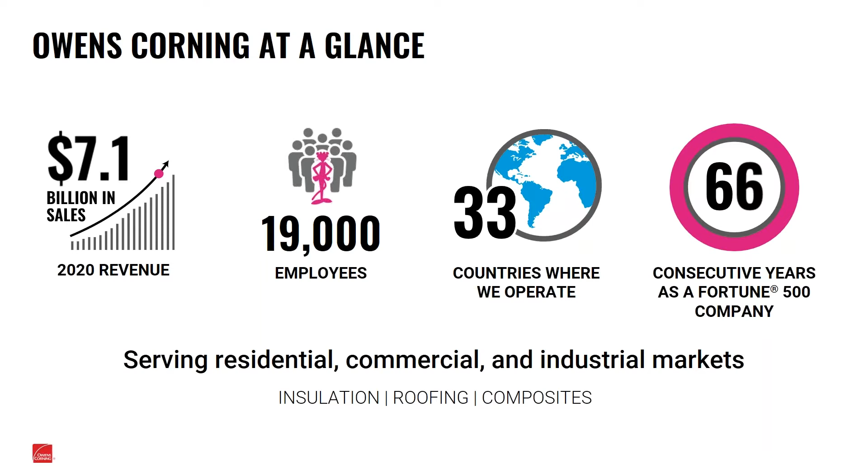Now, to start off with, we're going to do a quick introduction. The first question is, why do we insulate? We're going to look at the impact of water intrusion from both a thermal and corrosion under insulation, or CUI, perspective. And we're going to talk about moisture intrusion and how it happens. Next, we're going to talk about insulation systems design and material testing for moisture, which is something we don't always cover when we talk about CUI or system design. And then finally, we're going to end up with proper installation and also talk about the water-resistant mineral wool solution.

So going forward, the basic question is, why do we even care about moisture and insulation? Now, best case, and this is a very short-term problem, but let's just suppose we get moisture in our insulation. The first thing that it does is degrade the thermal performance. I always think of the analogy of if you're swimming in the summertime and you're hot, and you jump in the pool with your shirt on and you come out and your shirt's wet, you tend to feel much cooler until that water evaporates off your body, and then you start to warm up again. And that's because as that moisture is evaporating off your clothing, it's also removing heat as well, and it's also increasing heat transfer, which kind of helps keep you cool. But it's much worse if you have moisture in your insulation for an extended period of time.

You not only have the effects of degraded thermal performance, but you also potentially create corrosion under insulation issues. So now you have that water under there for a long period of time, and corrosion is a chemical process, and the longer that process continues, particularly at elevated temperatures, the more transfer of electrons, or more corrosion, that you're going to have. So one of the proposed solutions is Owens Corning's Thermafiber Pro Section WR pipe sections, which are a water repellent insulation. Now, water repellency by itself isn't necessarily the cure for these things. It goes along with a system which we'll talk about in a little bit. But ideally, the best way to get the thermal performance that you designed into the system, and to avoid corrosion under insulation, is to keep the water out to begin with.

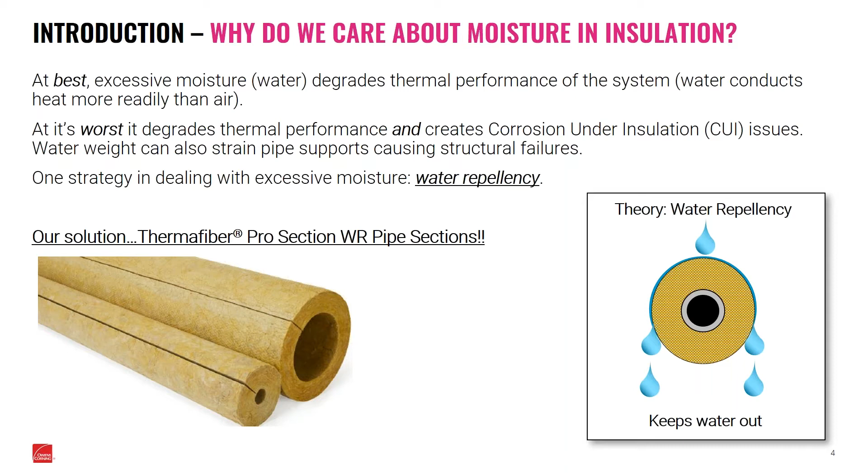Why do we insulate? People often ask, if there's corrosion under insulation, why don't we just remove the insulation? You could do that, but the problem is there's so much heat loss if you don't insulate something. It's a good idea in terms of efficiency, cost, and reducing greenhouse emissions coming off whatever power source you're using, whether natural gas or electricity from a coal-fired plant.

Also, because that's a cold pipe, moisture wants to condense on it. So the only barrier between that cold pipe and the moisture in the ambient air is either the insulation itself, like foam glass which is pretty impermeable, or a fibrous insulation like fiberglass with jacketing over the top to help prevent moisture from condensing on that cold pipe.

So if we're transporting this cold liquid, say from a chiller to the thing we're chilling, we can help maintain that temperature, or at least reduce the rate that heat enters the system as it goes from point A to point B.

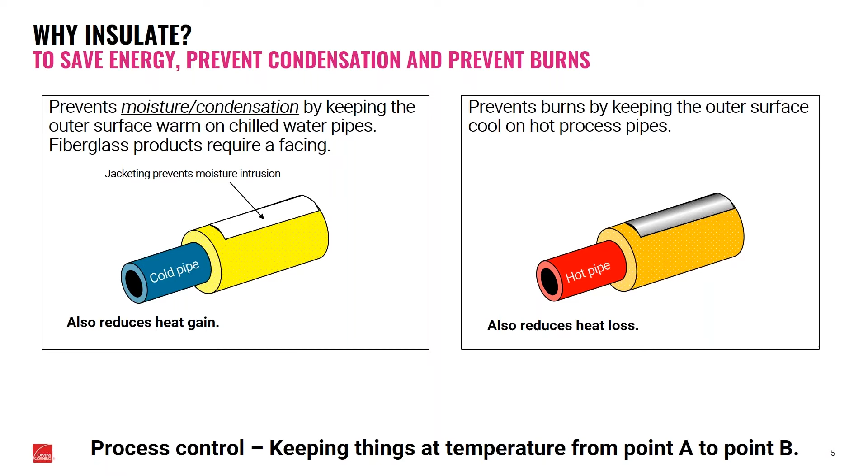Now, before we talk about moisture and insulation, let's talk about the insulation system. As an insulation manufacturer, we tend to have tunnel vision and only look at insulation, but really it's part of a much larger system, and this system has to work together.

If we go from the outside in, we start with the metal jacketing, which we have to help protect the insulation from the environment - could be weather, forklifts, people, just anything in that environment that could potentially damage the insulation. We want to put jacketing there to help protect it.

For an acoustical system, going clockwise, we'd have acoustic lagging, where we're adding weight to that insulation system to help dampen sound as it travels from the inside of the pipe to the ambient space.

And of course, we have insulation. Here we're saying it's there primarily for thermal reasons, although there are other reasons such as acoustical performance. In some cases you might use it for fire, but fundamentally you're using it for thermal reasons, to help keep the contents of that pipe at temperature.

Working our way in, we might have an exterior pipe coating, and again this is an optional component - probably a really good idea if you're in an operating range that's in that corrosion range, or where you might see a lot of moisture that could potentially get into that system.

Finally, you have the piping itself, and this is going to typically be one of two things: either plain carbon, which is fairly common, or possibly stainless steel in some applications that require more durability or more resistance to corrosion.

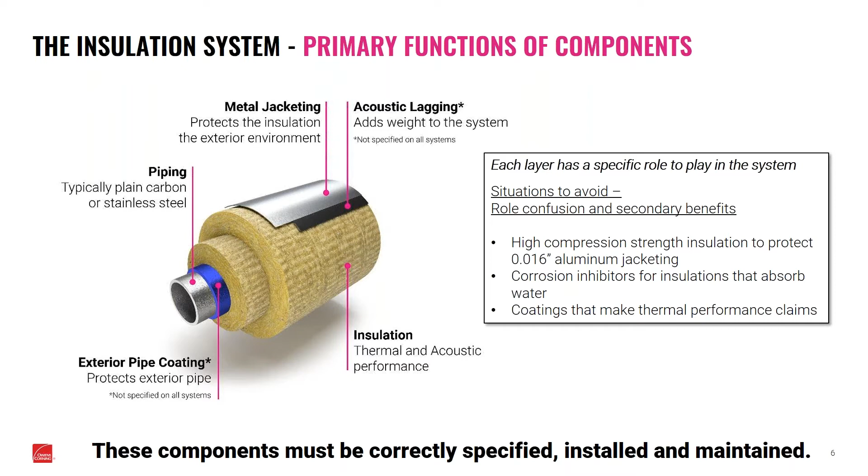So again, as you're looking at a system, you want all the components of the system to be correctly specified, installed, and maintained. We'll talk a little bit about maintenance later on, but it's something that we seem to forget about. Insulation is kind of out of sight, out of mind, so we don't think about it. But it is something we need to keep our eye on to make sure that we get the performance that we designed into that system.

Now, looking at the impact of thermal performance, I think anecdotally everybody knows that this is what happens. That water is going to conduct more heat, like the example that we had earlier. But if you look at water's thermal conductivity, it has 4 BTUs per inch per hour, square foot, Fahrenheit degree, which is about 15 to 20 times higher than what you would typically find with most common insulations, whether it's a foam plastic, fibrous, or cellular glass.

We have a system where, let's say we do add 1% moisture content, and it does impact our thermal conductivity. Even just adding 1%, we have a 23% increase in heat loss in terms of BTUs from that system, and we've increased our surface temperature 11 degrees.

Now, as we go each subsequent step, as we go from 1 to 2 to 3 to 4%, we can see that surface temperature actually increases. And we're looking at a 23-degree increase in temperature just from having insulation that has 4% moisture content. And we have a heat loss that's 51% higher than what we originally started with. So this is a real deal.

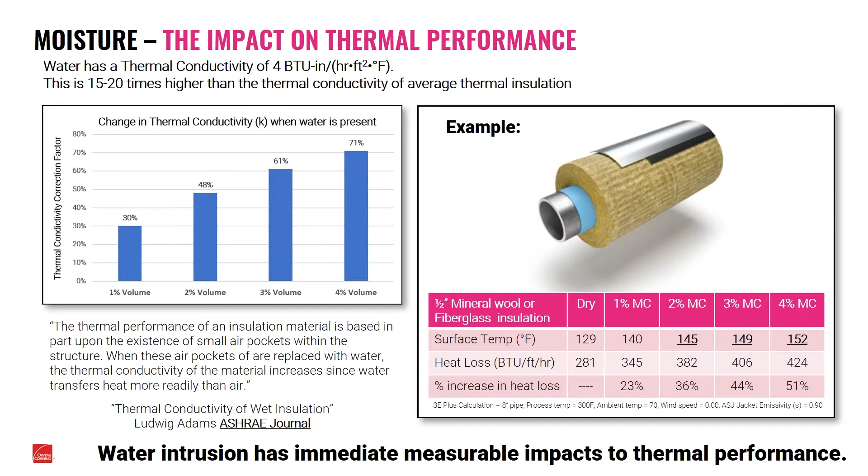Again, if we had to tolerate that short term, maybe, but not something we want to live with for very long, because all that equipment that we've sized anticipating a heat loss of about 300 BTUs per hour per foot, and all of a sudden we're dealing with 50% more than that, we're going to have a hard time with that equipment keeping up. So then that's going to create other problems.

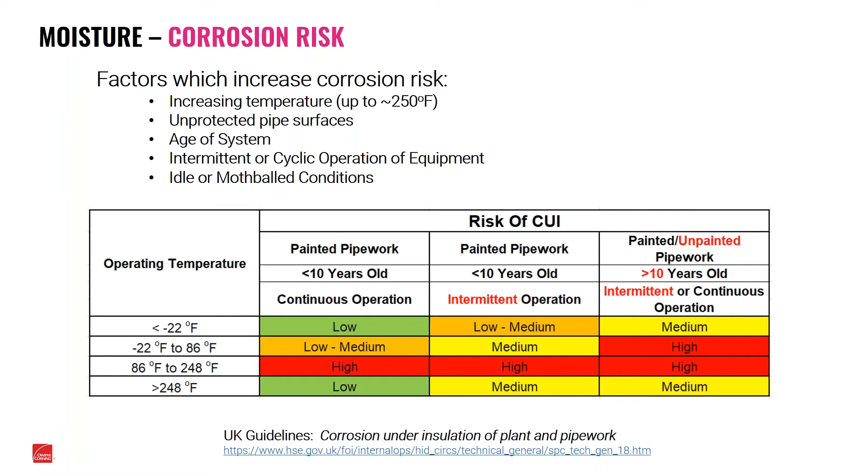So again, the impact of corrosion, and this is only one slide for those of you that have seen too many CUI slides. Corrosion's expensive. What happens is we have moisture that gets into our system because of any of these items: rainwater, flooding, pressurized cleaning, wind-driven rain, and a lot of times vapor penetration into the system. So there's a lot of ways that moisture can get in.

You can never make it completely vapor tight, at least on a high temperature application. If you're doing low temperature, you have to pay particular attention to detailing there. Hotter systems are a little more forgiving that way. We also have some other things to consider too, things like chemical exposures for both acids and bases, and salts.

I think a lot of times we tend to think of rainwater as being distilled water, not containing any chlorides. However, depending on where you're located, and depending on what kind of water you have available, you might have water intrusion from a freshwater source that actually contains chlorides. So any chlorides in the ambient air are going to get into your system.

Even though we have corrosion tests that look at taking distilled water through that insulation down to the pipe surface, they're using distilled water in that test. So if you're taking rainwater or water that has chlorides in it, and adding that onto there, your corrosion rate is going to be much higher. So again, another good reason you want to keep moisture out of your system.

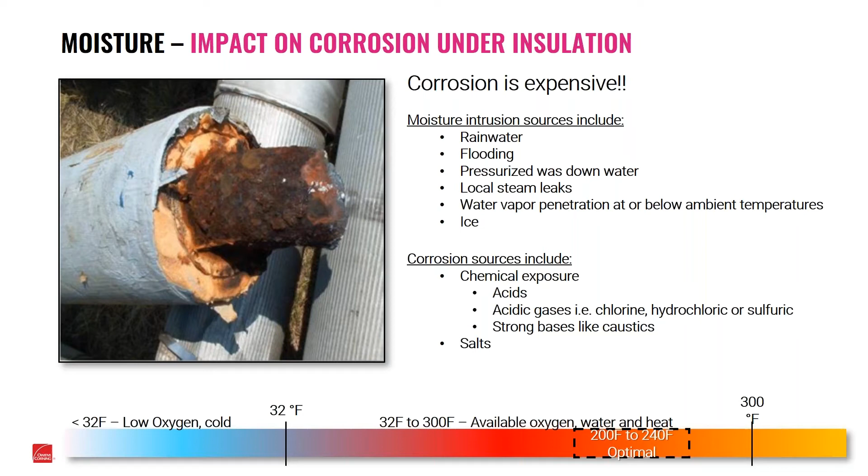Now, how does it get in? We talked about some of the sources, but here are some of the things we see in real life. If you look at the image on the left, you can see we either have damaged or missing jacketing. I think a lot of times somebody looking at that at a glance might think, oh, it's on a hot system, so the water will just boil off, so we don't really need to put jacketing on there. But once that gets saturated, you start having those problems we just talked about.

Maybe you have poor detailing, like you see in the center picture here, where they've actually just cut a gap in there. So unless that is protected from the elements or from any water sources, that's a prime entry port for moisture to get into that system.

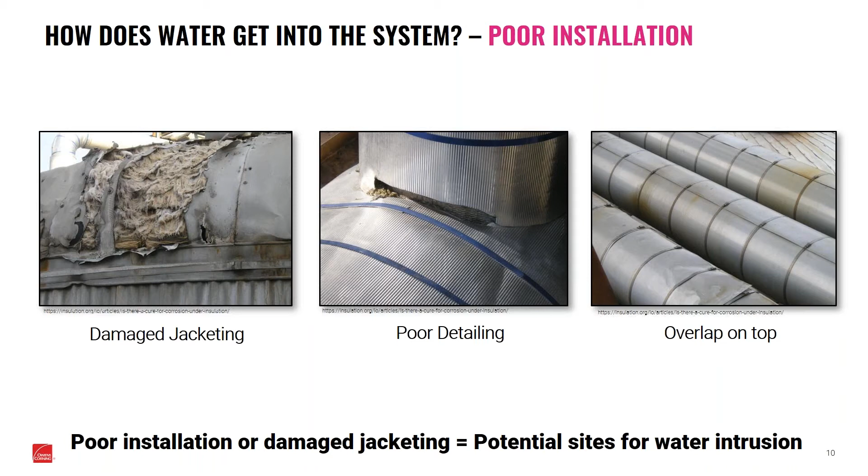On the right-hand side, this jacketing job looks like it was done really well. The only problem is they put that seam right on top. For those of you in areas with snow, we know snow will accumulate on top of these systems, and water will wick between those two layers and infiltrate into the system. We always want that overlap at the 9 or 3 o'clock position with the flap facing down, so it sheds water away from the system rather than sitting on top. But anyway, those are things we commonly see.

Now this one I think kind of tells it all. If you look at the topmost arrow, you see some discoloration there. Who knows what's going on, but maybe it's getting some oil on top of it, which might be protecting it, or it could be something corrosive eating through that jacketing. We don't know. It's a symbol that there's a leak somewhere.

If we look at the arrow on the left-hand center side, again we see another lap that's on top, and again we know the reasons why we don't want that to happen. But I think more telling is this pipe that's closer to us, the larger one.

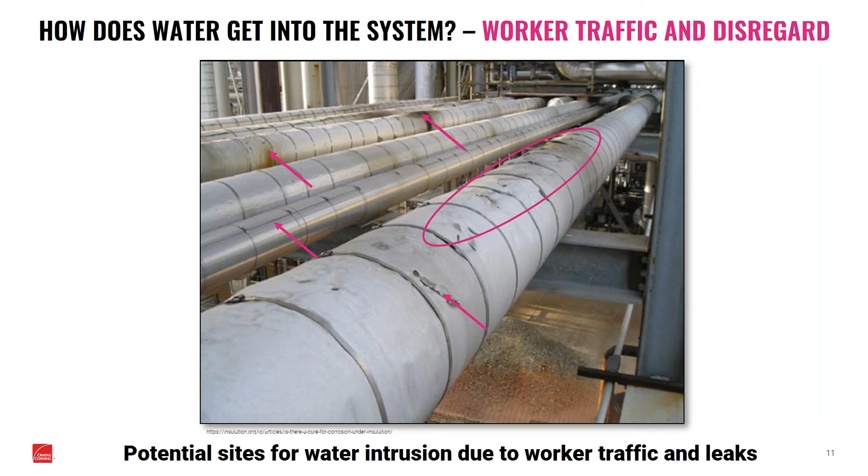Now, when we talk about insulation and water repellency, or how you design for moisture intrusion, there are usually three different ways this is done, and these are usually driven by insulation types. One theory is that you use water repellency, which just keeps the water out - it sheds the water away. That one seems to make the most sense. If it never gets towards the middle of the pipe, then you've done your job.

The other theory is to use corrosion inhibitors. So if you have an insulation that might absorb more water, maybe you want something with a corrosion inhibitor in it, so at least if any moisture does get into that system, it reduces the corrosion potential down to something like deionized water, reducing that rate dramatically. The only challenge is that even though you have that corrosion inhibitor helping mitigate corrosion, you still have the impact of lower thermal performance because the insulation will conduct a lot more heat through that wet segment.

And then finally we have our third theory, which is a combination of both, where you have water repellency and corrosion inhibitors. That seems to make a lot of sense too, and some material types actually do this - you keep the water out and also reduce the corrosion potential if any water does get in.

One thing to note here, though, covering pretty much all insulation types, is that waterproofing agents will oxidize above 600 degrees, regardless of insulation type, with one exception: foam glass. Because it's impermeable to water vapor transmission and liquid water, it keeps its water repellent properties up to its 900 degree maximum use temperature. Otherwise, these other additives used for water repellency will burn off at about 600 degrees Fahrenheit.

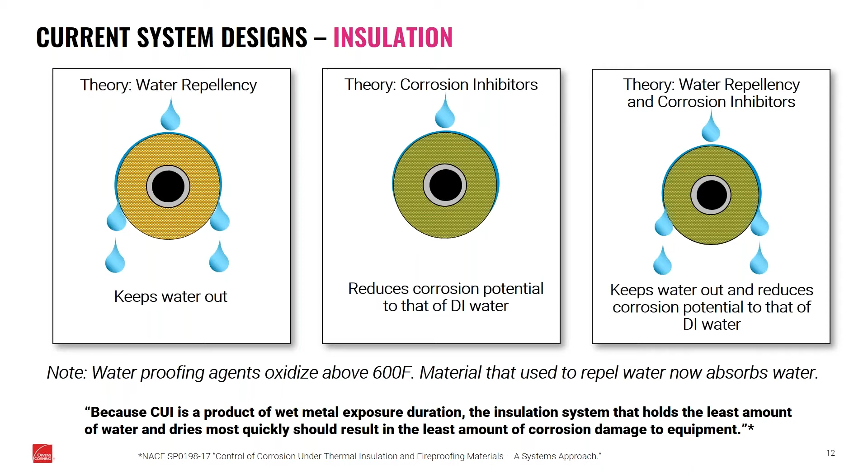Now, looking at all of these - and we see all three of these in the marketplace - I always come back to this statement made by NACE in their technical paper, the SP0198 paper, that because corrosion is a product of wet metal exposure duration, the insulation that holds the least amount of water and dries most quickly should result in the least amount of corrosion damage to equipment. So to me, the best way to deal with these problems is to keep moisture out of the insulation to begin with.

One of them is water vapor sorption. This is how much water actually clings to the surface of the insulating material, typically done with things like mineral wool, fiberglass, and aerogel blankets. We take the product, put it in a humidity cabinet with high temperature and high humidity for 96 hours, then weigh it once it comes out. Generally those numbers are pretty small for the products tested—for fibrous materials, it's less than 5% by weight.

Another thing we look at is water vapor transmission. Although no insulation type has this requirement itself, you'll see this associated with insulation facings. One reason we care is that a facing usually has a very low perm rating because you don't want moisture going into that system if you have a chilled water line. The higher the perm rating, the faster the insulation will dry if it gets wet, because water vapor can more easily pass through something with a higher perm rating. It's about how much moisture passes through something in a given period of time.

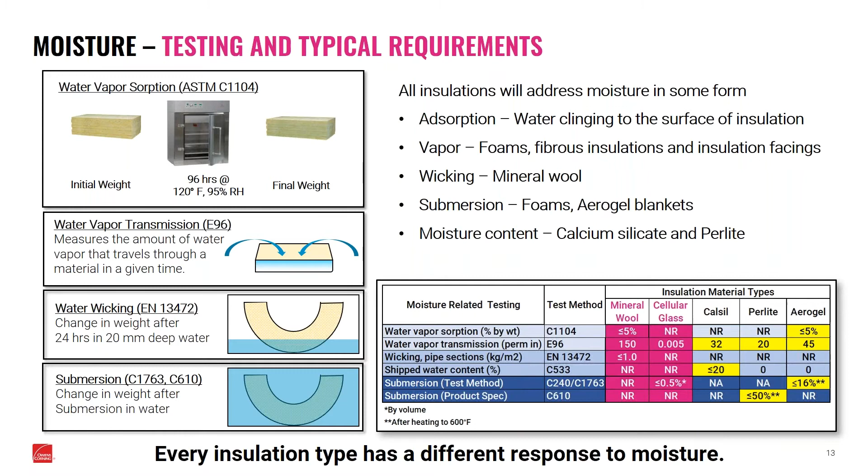One of the benefits of mineral wool is that the water repellency helps keep the water out. And because, as we saw, when we talk about water vapor and perm ratings, that's the ability of water vapor to pass into and out of the product, water can very easily get out of that system if it does get into that system due to leakage.

It's also low density so it won't hold as much water. Imagine if your product holds 100% moisture content - you'd rather have a lighter product than a heavier product. If you have an 8-pound product, maybe you have 8 pounds of water in it. If you have a 15-pound product at 100% moisture content, you're going to have 15 pounds in there. So the less water you have, the less you have to drive off or try to remove from that system.

And then finally, mineral wool has low shrinkage. The advantage to that is as you heat it up, those joints don't shrink and you don't create gaps where moisture can actually go in and bypass the insulation. But again, the best way to prevent corrosion is to keep water out of the system in the first place, and we want to fix the problem and not the symptom.

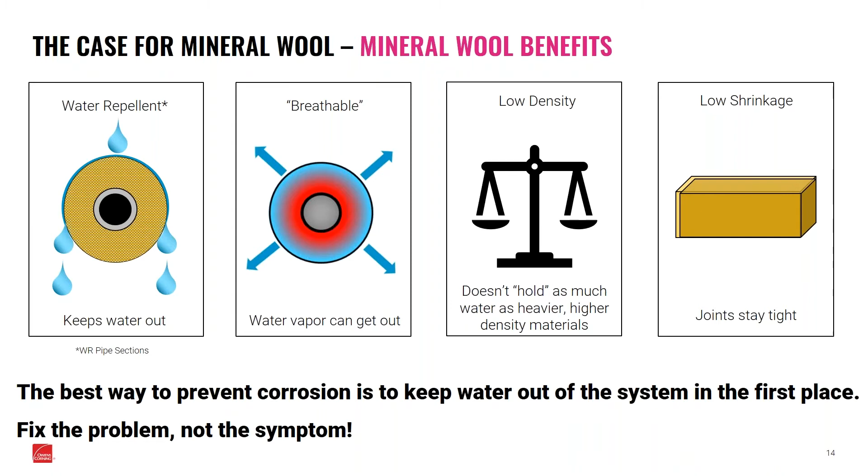So here's the slide promoting the product here, and this would be the Thermafiber Pro Section WR pipe insulation. Now, even though there's a great story here to tell about water resistance, there's also some other good things about it as well. We have a lot of acoustic information on this product, and it comes in a longer length for productivity, but that's for a different webinar.

The point is that we have water repellency to 572 degrees Fahrenheit, which is the best in class and highest temperature water repellency in the market. It also has the lowest amount of water wicking into the product in the marketplace. If you see that plot down below, you can see the requirement of 1 kilogram per square meter that we talked about earlier, then you see the next closest competitor, and finally our product at the bottom - significantly lower. And again, because mineral wool is vapor permeable, it will dry quickly if it gets wet.

It's lightweight and doesn't have an impact on coating adhesion, and that's something we'll talk about in the next slide. But that is also something that is out there that could potentially influence your decision.

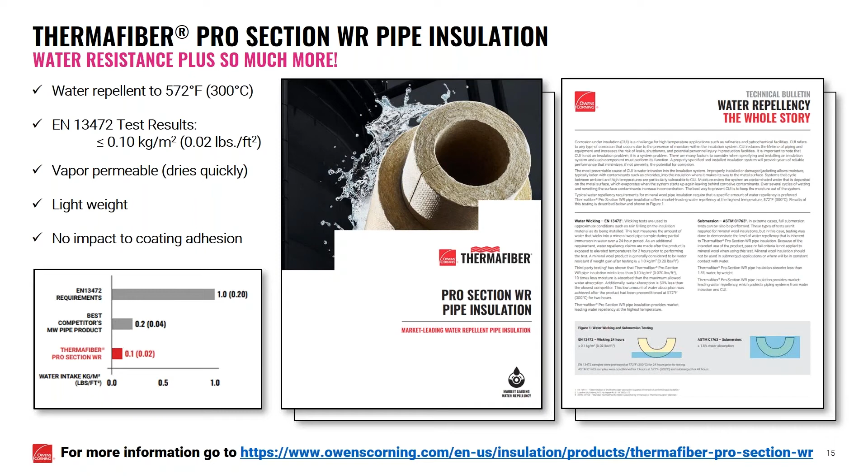Now, we have information on our website regarding not only the brochure for the Pro Section WR product, we also have a technical bulletin on water repellency that talks about the wicking method, submersion, and also the impact on coating adhesion. So it gives the whole story of how our water repellency works, as well as the adjacent topic of coating adhesion.

So what is it about coating adhesion? One of the things you'll see in specs is there'll sometimes be a requirement that the waterproofing agent will not impact or contain silicones that could impact the potential for coatings to bond to a substrate. Usually that's a coating you would apply to a pipe, probably a carbon steel pipe.

One of the problems is when you use a silicone and spray it on the surface of your insulation, it can also impact the way that pipe coating is going to bond to that pipe. What you'll see is little pinholes where that coating doesn't flow properly over the surface of the pipe. One of the ways they test for this is using the VW 3.10.72 standard referenced in the marketplace. What they'll do is take a sample of this insulation, scrub it across the surface of carbon steel, then coat that piece of carbon steel, and look for defects.

What they're looking for is those little pinholes that we just talked about. Or they'll take a piece of carbon steel, put insulation on top of it, pour solvent through the insulation, and allow it to sit in that solvent for 10 seconds before they remove it. They'll let it dry, then coat it, and again look for those defects. So depending on which method you use, it could have an impact on whether your waterproofing agent is going to impact the ability to coat something.

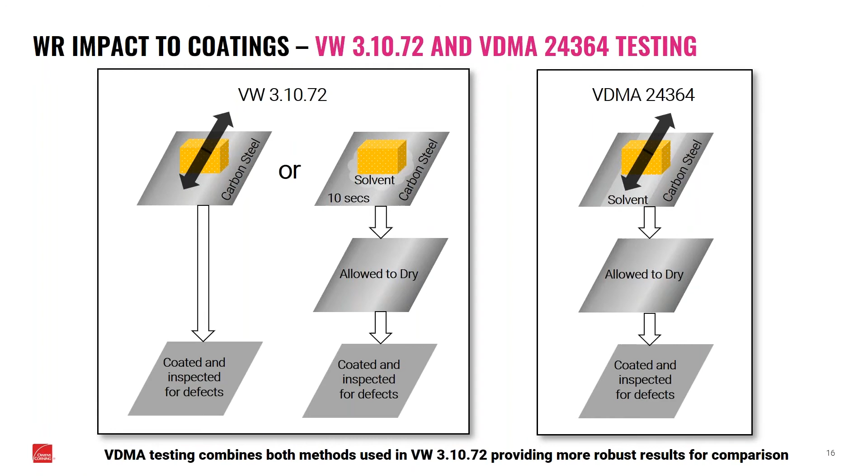We've done that with our product, and the results show that our product can be used in spaces where they are applying coatings, and our product can actually be in contact with the equipment being coated and the equipment used to do the coating. So you won't have any impact or negative effects if you're using our product in an atmosphere where you're going to be coating as well.

Now that's the insulation part of this. The other part is, as we talked about earlier, you want to make sure you properly select and install the insulation material and system. You always want to seal along longitudinal and circumferential joints. You want to shingle joints like we talked about earlier, and there's an example on the right-hand side. If you see between the correct and incorrect, if that water drop falls on top, it's going to shed off the lip on the left or right-hand side. Whereas if you look at the image on the right, you can see that water droplet is going to go right into the jacketing and then right into the insulation system.

Another recommendation would be to use drainage holes in the underside of insulation when possible. Again, this is only for a hot system - you do not want to do that for a cold system. But if you do have an area that could potentially accumulate moisture, that's certainly a consideration.

We talked about this earlier, but using thicker jacketing in high traffic areas certainly makes sense, and it's a lot cheaper than having to replace insulation or remediate a section affected by CUI because the jacketing has been damaged. You want to use the proper jacketing. GRP claddings, glass reinforced plastic, those work really well. They're flexible, they provide a lot of durability, and that might be something for you to consider.

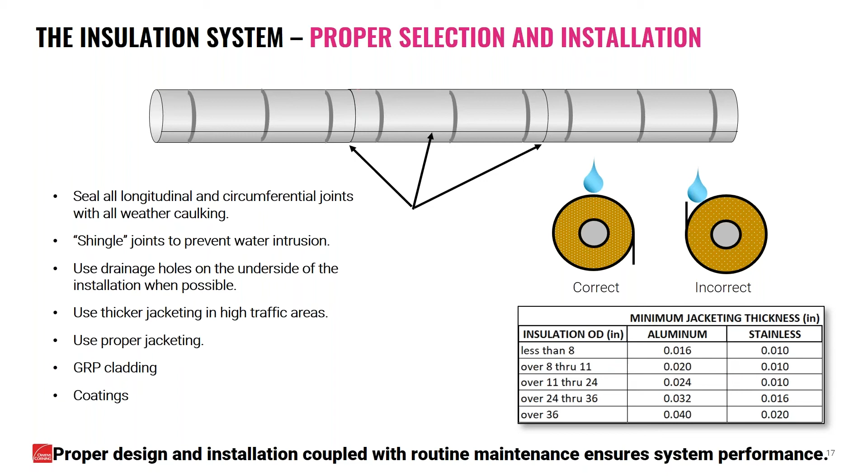If you're developing an inspection program, you always want to find out what those high-risk spots are, and you're going to monitor those more closely than maybe some of the lower-risk parts or some of the newer parts. But you should have a plan in place and a schedule for checking to make sure that these things are remediated before they get to be large problems.

I think the interesting thing is API, NACE, they all have the same recommendation - you're always going to want to look at those possible entry points and make sure that those are flashed, caulked, sealed in any way possible. To borrow from our roofing folks, you always want to think like the rainstorm or the water drop - how am I going to get into this system - and try to figure out ways to shed water, avoid standing water, and keep that moisture out of your system. Sometimes it requires a little design attention and making sure it's installed correctly, but that time spent up front is certainly worth the value that system will have if it's installed and maintained properly.

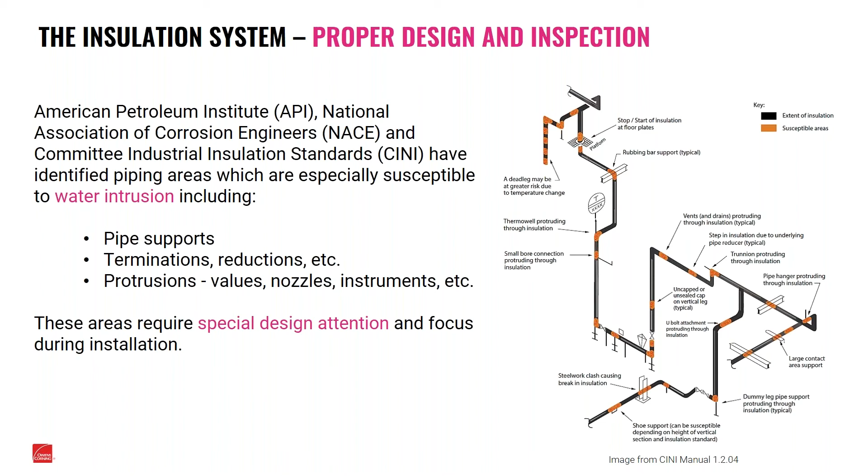So to sum everything up, we always want to design things to keep the water out, but we have to assume that it gets in, and we have to think about how that's going to get out if it does get in. We want to consider drain holes in above-ambient conditions, and use water repellent insulation where appropriate, because you want to shed that water away before it even gets close to your pipe - that's the best way to keep it out to begin with.

And you don't want it to absorb into the insulation, because then you have that problem with increased energy usage of that system. You want to make sure the insulation is installed properly and that you've got the right insulation on your job. And again, you want to inspect and maintain that system. For the water repellent insulation part, we have our Thermafiber Pro Section, which we talked about earlier.

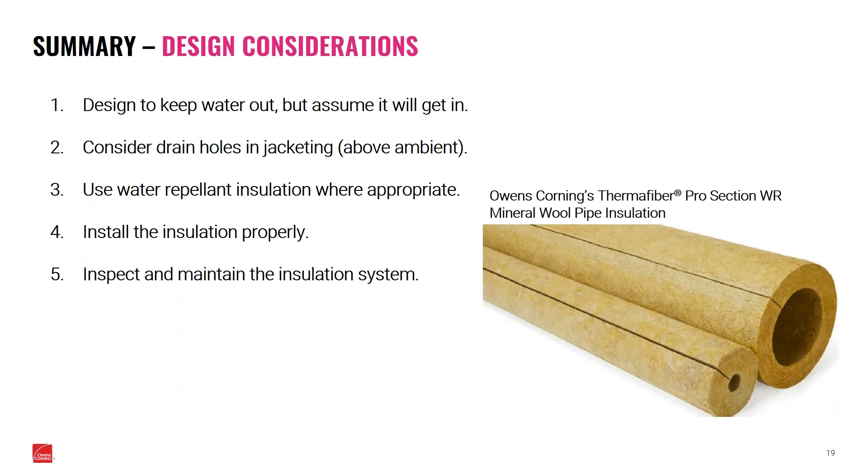Now, to wrap everything up, we've talked about a lot today. There are a lot of additional resources out there, and two I would point out. One would be NIA - they have a lot of information and training available for not only energy appraisal programs, but also training programs for insulation inspection and specification. They have specification guides, material charts, calculators for probably everything you would want to do. There's a lot of content on different topics, things like CUI, personal protection, materials - it's a great resource as you design, specify, and assemble these things.

The other resource is our NAIMA 3E Plus software. It's free and on our website - the link's here, or you can go to the industrial portion and it'll be on that page as well. 3E Plus is a great tool if you're looking at determining your safe-to-touch temperature, which is the software I used in that earlier example about how we increase the temperature. But it can also be used for figuring out the thickness of insulation needed to avoid condensation on a pipe if it's a chilled water system. There's a lot you can do with it - if you're using different material types, you can figure out what combination can work even in a strange configuration. It's a great tool, pretty commonly used and easy to use.

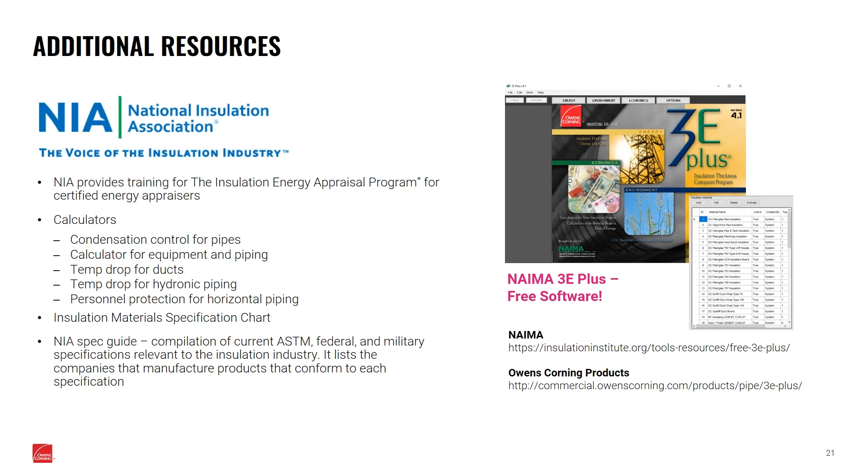I highly recommend it. We also have Owens Corning resources - I invite you to visit our website and see the product offering we have. They're all tremendous products, I think, and there's a lot of information there as well, including our ebooks, guides, guide specs, user manuals, things like that. So there's a lot of information there.